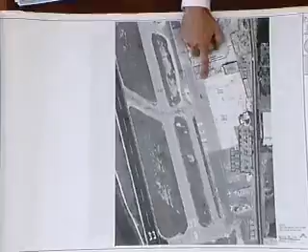Originally, the T hangars were going to be built here, and after the Planning Commission came out and looked at it, they agreed it would probably be better if we relocated them to this spot.

And these are views from across the street where the hangars will be located.

Instead, that's the view over here, from if you were standing near the sewer treatment plant, looking out to the west.

Across the street. Do you have any photos taken a little bit farther away looking at this? This is the farthest we could actually get, like up and down the street looking at it. This is taken from the sewer plant, which is across the street.

Do you have anything from farther away looking at it from the north looking south, or the south looking north? I have some. Might help, unless nobody else thinks it's necessary.

This is one looking from the new terminal down to, I believe, the FBO there, and the current location of the Atlantic's T hangars. This is inside the security fence at Atlantic's parking lot. That photograph is taken from right about here, looking that way, where hangar number 3 is.

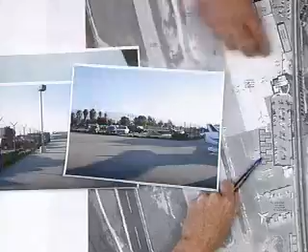This one is also inside the tarmac, looking towards the parking lot, at the corner of their security fence. So it was right about where those planes are. That's this corner, shot in that direction.

This one, a little further out, about here, still looking to the east along that fence. This one, right along the fence, looking from approximately the corner where the fence takes a 90-degree turn, looking this direction.

Looking back at the hangars, some of these are redundant, just a little bit better. Those are all from being on the airport, like if you're in an airplane or one of Rogers' machines. Yeah, these two were taken from across the street; those were all outside.

Did you make any changes to the design? We should probably look at that again because we have some new board members that haven't seen this project at all. Yeah, we did.

The request was made that they wanted a different design that's more traditional to the Santa Barbara Airport, so we popped the roof up, as I think one of you gentlemen suggested. We changed the style of it. We put skylights in there to liken it to the old hangar building that you view from the terminal.

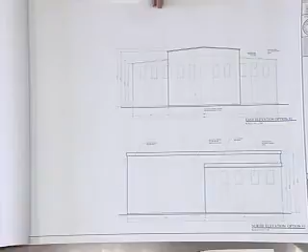Even though this faces the street, we put plexiglass skylights to be sure that rocks thrown from the street into an airplane would be less likely, to make it less of an attractive nuisance for kids to throw rocks through and cause damage to the interior or the airplanes inside.

We have more elevation views. All four views.

Do you have anything else you want to add to the presentation? We're just anxious to get it done.

Do we have any public comment for this item? Okay, question. Oh, I'm sorry, Madam Chair, could...

In November, the Planning Commission reviewed this item in concept and had some comments in their minutes that were addressed toward ABR, so if I could go over those.

Please. The Planning Commission expressed appreciation for the applicant's flexibility with changing the site and agreed that the original proposal was not supportable.

Commissioners Jacobs and Jordan asked that ABR spend time to create architectural variety that breaks up the design, includes landscaping, and consider facades.

Many commissioners agreed that preserving the view of the aircraft from the terminal is important and preferred this option to the original proposal.

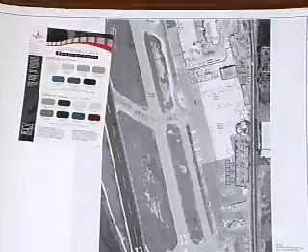So those windows are opaque. They're not—yeah, they're opaque.

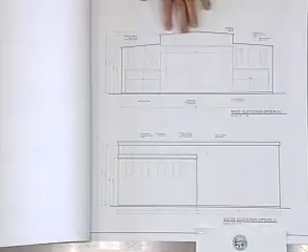And they're all staged by Atlantic Aviation. In other words, his personnel opens the hangar up, pulls the airplane out, and stages the airplane for departure. So the user of the hangar, for all practical purposes, is not in the hangar. Right. Okay.

One last question. Do you have any plans that show this building in relationship to any proposed landscaping as well as the existing landscaping that's next to the parking area? We haven't, in that the parking lot was already landscaped when we built the FBO 3 years ago.

Okay, and the problem is putting in the additional landscaping. We can certainly put shrubs or anything like that, but anything of any height—I think Andrew would be able to speak to it more clearly—is an FAA regulation where you can't have it that close.

There's already landscaping along this fence line, in the center here and on that side. So one of the questions I was wondering is what that separation is. Do you require like a 3-foot walkway so somebody can get behind here? I was kind of looking for a larger site plan to sort of see what was happening there.

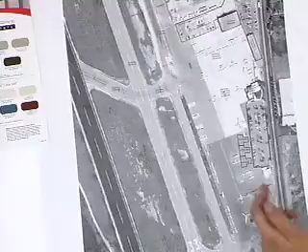The separation is really maintaining the AOA—you have to have 10 feet from the fence line, so that people couldn't climb over a tree to get onto the ramp. Okay, so it is 10 feet. So there's a 10-foot separation from the fence that's at the parking lot to the face of the building.

And that separation will be all asphalt? Yes, the way it's being proposed right now. And the landscaping happens to be on the parking lot side of the fence? Correct, and the asphalt's already there. Correct, and the airport won't allow us to put any landscaping on the inside of the AOA.

All right, thank you. Gary? I think all that, yes, that's all the questions, so that's good.

Kirk? Just to continue with Paul's question, because it does look like there is existing landscaping in this landscape strip adjacent to where your building goes, if I understand it. Yes, in the parking lot. In the parking lot, so, correct.

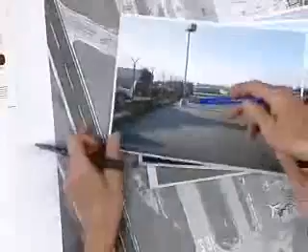But it's very low ground cover, basically. It looks like it's neglected. So is there an opportunity to plant in that space and augment that? No, the landscaping is maintained by Kitson. They actually do a very good job, but there isn't anywhere you could really put any landscaping there without being in violation of the Federal Aviation Regulations.

Well, for example, couldn't you plant a vine that would grow on that chain link fence? Would that be against the FAA regulation? No, it won't allow that either because you have to be able to see through the fence. Okay, it's a good idea.

There isn't any more empty areas of grass or anywhere where you'd be able to put in any more trees. Okay, all right, thanks.

All right, Chris? Just again to piggyback on that—in that existing planter, is there an actual height limit against that fence? Is there some sort of a code that we can point to that says no, you can't have this here? Yes. What is it? Andrew, do you know?

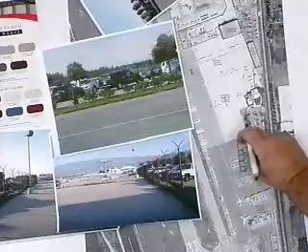I did have a question I wanted to ask. If there was a fence line here and here, same as this fence line, would that area still be part of the flight area? Could it be landscaped if this was not accessible from this area? And then could it be landscaped?

Are leases zoned as AOA and ramp? I don't know, I'd have to get with the airport directors and find out if they would allow that. Right now, it's considered ramp, and our lease doesn't allow us to put any vegetation on the ramp side of the property.

Chris, you want to start? Because a lot of the conversation is revolving around landscaping. Okay.

Well, from the way it sounds, we're not going to be able to get any additional landscaping to screen this thing, so I don't know what I could really add to that, other than we'd hope you would explore any avenue possible in terms of screening this from the street. Another thing I'm wondering is if it would be possible, as you had done in a previous submittal, to space those out a little bit more so it doesn't just look like one enormous building. If we put 10 feet in between each, then we get a little more light in between and break down the apparent overall mass of this. I know it'll stretch it out a bit, but I want to get the board's opinion on that as well, if that would be a helpful endeavor. But other than that, I don't know what we can do with landscaping, really, in this case.

I have two, can I comment? Really quick, yeah, because you could probably answer if they can be separated. Well, right now, that's why we elevated the buildings in the center, so that it would break it up. So right now there will be 3 different heights instead of the original plan, which is all one height. We can separate them if you would like additional differences there.

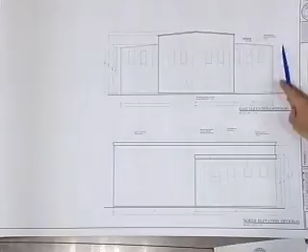So we need to see what that's going to look like altogether. So, for example, you've got these side wings, which are sloping in this direction. There's no gutter shown. And then you're going to have a building right adjacent to it, which is sloping in the same direction. So how are you going to handle the water that comes there? I'm raising questions here, just in general. Front to rear, they don't go from side to side.

But we don't have a roof plan that shows us how that's going to be handled, how the water's going to be handled, whether there's going to be gutters or not. There's a lot of missing information. Still a concept review, but they're really good points.

For me to be able to evaluate it architecturally, I need to see the facade as all three buildings proposed together, adjacent to one another.

Yes, that's it. Oh, there's one other thing: lighting. If there's any exterior lighting being proposed, we would need to see that in cut sheets as well. All right, thanks Kurt. Gary.

I appreciate the move towards moving the project over to this end as opposed to being in the view. And I do like the idea that you've got some fenestration on the street side, and I think these are all positive moves.

I do agree with Kurt that we have some projects we've approved in the past that replicate more of that military style. I mentioned this once before at a previous meeting, and I still would like to see it in that style, but I just want to voice my opinion on that.

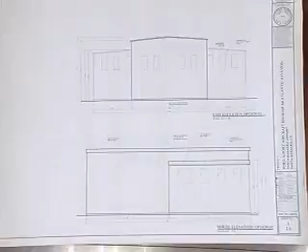So I can understand the logic of keeping it tight. One thing about the frames around the windows - this is what is perfect for a metal building, but like he made reference to the hangars off of Hollister, they're great-looking buildings with kind of a wooden Old West facade, and then there's a metal building behind it. If there was a way to put some framing material or sill to dress these up a little, maybe have half as many openings but spend more money on each opening to make it look more reasonable, instead of just simply inserting a translucent panel versus an opaque panel. That'd be one way of dressing up the building, making it more pleasing to the eye, because it will be seen from the public.

That's my biggest complaint or concern, and I think it's a fixable thing. You don't need to have this window tight in the corner, and you can rearrange these pieces. So it's a great project. We found a solution, we found a location. Now we're just doing a little bit of the eye wash stuff.

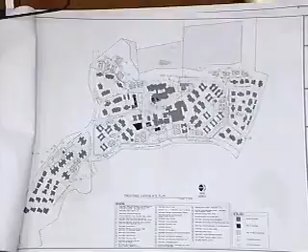What we're focusing on today is the areas in green. So we have the gazebos, which is basically like a neighborhood clubhouse, with laundry, a sink, and a little covered area, and that happens in 3 different locations on campus. Right in this location, we're tearing down an existing laundry and replacing it with a very small utilitarian building. The existing maintenance building is right in this area.

We are tearing that down so we can put in a parking lot for staff. We also have the new maintenance building, which is 1 story from the parking lot side and 2 story from this side over here. In front of that is a 1-story building, which is our new laundry. And over here is the existing pool and the pool building.

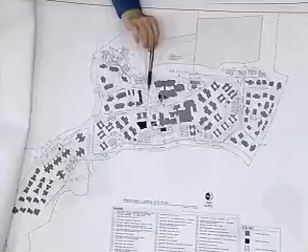One of the new things is we're looking at putting in a cafe in this area. One of the requests as we've gone through this project is an additional option for eating, and we had it in this area over here, but it's going to work out better closer by the pool, so I'd like to show you that probably last. Moving forward, so here's our maintenance building and the laundry.

One of the things that's changed is we had to work out an accessible path of travel, so we've moved our parking over a little bit. What's not shown here is some of the planter pockets along here that are in the landscape plan that has already been approved, but we still have the planters. Our accessible parking spaces moved over so we can get a path of travel that comes all the way down and across. This is something we've been working out with pre-case with the building department.

The basic changes are we took a notch out right in this location of this building, which you can see better in this location. Basically we just moved this back—it was flush, and we moved it back so we could create a place for a truck to back up and not be in the lane of travel. That way they could back up, and a lot of times we'll be receiving items for a remodel of one of the 200-plus units on campus—toilets, lighting, sinks—and we can back it right up and put it into a storage container quickly. We just didn't have the room as we started to study things, so that's a change.

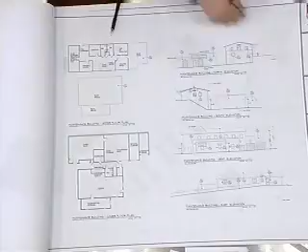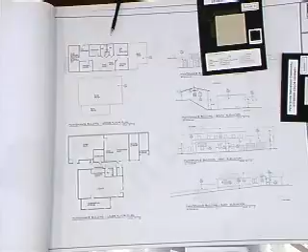Another change is we've added awnings. We wanted a little bit more interest in the building. The colors we've looked at—this is a color that we had, 7 different colors approved as part of the residential portion of the project, and this is one of those colors. Basically the maintenance building would be this green. It's up against a hillside, backing up on a nice gradual hill in oak woodland, so we're proposing the green color, and the awnings would be this black.

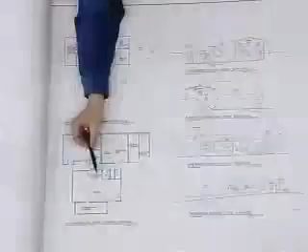I think those are the major changes that have happened on the building since you've last seen it. That, and we lost a bathroom in this location so we could put in the large electrical panel that we found out was going to be required because this commercial laundry took so much power. We were able to work that out with the building department and use the space of the restroom to create an enclosed mechanical room.

This is an enlarged site plan showing one of the gazebos and then the only laundry building.

Now, more on the south side is the other gazebo, and since you've last seen this, we restudied it. For some reason, the covered area was on the north side. That didn't make sense as we started to get into things, so we switched it to the south side and kind of redid the bocce ball court, bringing it a little closer. That's the major change there, so our accessible path of travel came around.

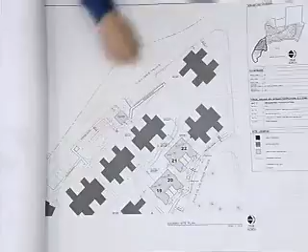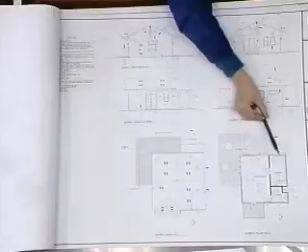Here is the gazebo building. So we have an entry element, and then we've got the covered patio. Here's our entrance, it's just a small activity room. We have a laundry and kind of an area where if you wanted to bring some food and lay it out, you could have a little gathering there with friends. And then a restroom. So it's a real simple building, and we try to keep it very similar to the detailing that is on the residential buildings currently.

So there's a lot of the similar detailing that you've already seen, same lighting, things like that. And the color for this building is this golden color. We've tested it on campus and got some good feedback from residents, so it's cheerful but not too bright a color.

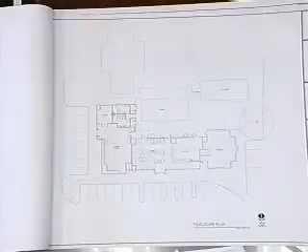Here is our cafe building. So here's the building. This is the existing library, it's right here, and we're not planning on touching that portion of the building.

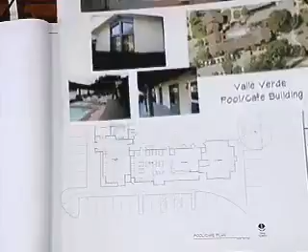There is an overhang that happens right here, you can see the overhang. So we're going to push the building out past that overhang, and then we're going to create a little entry element. The library pretty much stays as is. One of the other things is we're redoing the bathrooms so we can have changing rooms and bathrooms that meet our required number of restrooms. So that's a remodel in this area here.

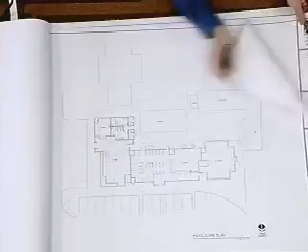So the building is also this yellow color, and the awning is this deep green, which will pick up some of the green that's in the proposed roof.

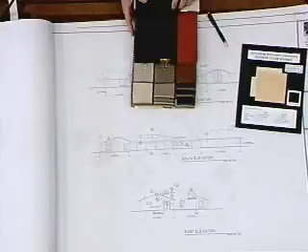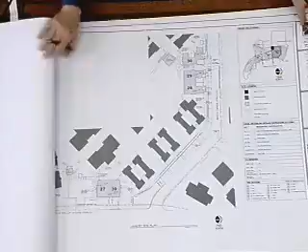This is showing the laundry building. So it's the only location right off of Calle de los Amigos, but kind of back behind a parking lot, and it's just a simple building. One of the things we had to study is how to make the building accessible, and so that's why there's a couple different doors, but that's what made the building as small as possible, being able to provide the accessibility more of it on the outside, less of it on the inside.

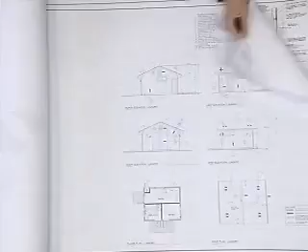Just kind of trying to keep within the residential character with a lot of the residential detailing and the same lighting as well. Most of these details you've already seen with the residential portion of the project. And we purposely tried to make the residential work with these buildings because they're similar in scale and size, so the detailing seemed to work well.

The newer details, like the scupper detail, that's for the maintenance building. And then the lighting, they're all the same lights as were approved with the residential. So, all right, that basically sums things up.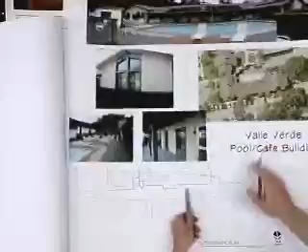Okay, and there's understory planting there as well? A hedge along here, yes. Are these planters or shrubs here, or are there actual additional planters along the front? There's no planters currently in this area - that's what we're seeing. So yeah, these are existing, and we're keeping all of these.

So it's on the back side, I think - isn't that on the back side? That's on the back side, and it's on the front side currently. Okay, so this is showing the front - oh okay, and this is the back right here.

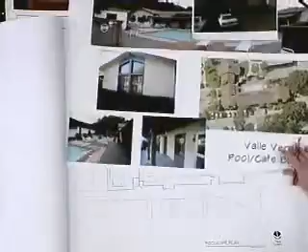The other question was about the pool, if there's any planting in that zone, or if that's as stark as it looks on the plan. There hasn't been a plan to have any planting in that area, but we just thought you should know. No, okay.

I guess this was a question for staff - the staircase along the south elevation of the maintenance building on the plan. Not the maintenance building. Let's go back a little bit. I was curious about this staircase here, if there needs to be a landing to break up that continuous flow of steps.

Thanks, Chris. More questions? Kirk. I'm sorry, I didn't catch the two color schemes - are they applying to different buildings? That's correct. The maintenance building, which is closer to that hillside, we made a darker color. And then the other buildings, which are the gazebos, laundry and pool, have this brighter yellow color - it's pretty bright for the existing campus, but we've tested it and feel like it can hold its own.

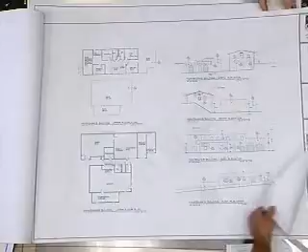I think, let's go one floor. I think that this elevation right here could use some something to it, because I think it's visible to the street, is that right? Is there a street and a sidewalk next to it? Well, it had 8 feet of electrical meters, but we removed those. It had 8 feet of electric meters?

We could probably find some type of fenestration that could fit in. Could we put some sort of detail on there, or fenestration, or something other than a drive-in movie theater screen? Yeah. That's my only comment. All right.

Kirk? Sure. I agree with the previous comments, and also I'm wondering on detail 55, the parapet detail, whether the metal cap, the flanges that go over the wood trim, could be reduced in height to a minimum, say like 1 inch. The way it's drawn, it looks like it's 2.5 inches. Other than that, I think it's a nice proposal, in keeping with the existing.

Chris? I agree with the previous comments, and the only thing I'll add is that I would encourage the applicant to increase the planting in the pool area wherever possible, whether it be new planters, potted plants, or possibly vines on the columns of the arcade there. That area seems quite stark, and it seems like a good opportunity to upgrade the area with all that's going on elsewhere.

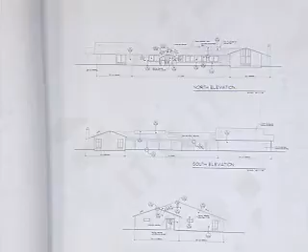Instead of just, you're going to have two pieces of equipment separated by 15 feet, so he's creating a really big wall that looks like a screen rather than looking like a chimney or something. That's my opinion, it may not be anybody else's. It just looks like an awfully big appendage to the roof that doesn't need to be there. So my opinion would be to screen them, but separately. And did you describe the trash enclosures that are part of the application?

The trash enclosures are just wood, that's what's currently on campus. How many of them are there and where are they? You didn't talk about them at all. I can come back with those when I come back with the maintenance building. But it's just wood, we're still working out the accessibility and which ones are required. So you're not going to include that - whatever you get today, you're going to come back with it.

I agree that there needs to be trim added to those buildings. Even though we have a storage building that's a 2-story building, I think it should be detailed the same as all the other buildings. I think that's the consensus of the board. So even the maintenance building gets the trim around the windows? Yeah.

That's all I have. So Justin's asking for final approval of everything but the trash enclosure that he hasn't gone over yet. I don't know how the board feels about that, but does anybody want to take a stab at a motion?

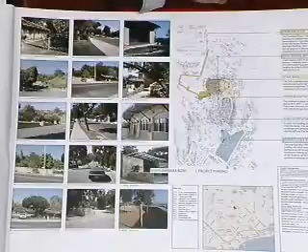So we are located on Milpas, right where it turns into Anapamu. This is our last project in a 20-year master plan with the Bowl.

Just looking at this briefly, we have the Overlook project. We've done Phase 1, Phase 2 is under construction now. We've completed the stage and basement and the pavilion in the main part of the theater. We've done a gate structure, Glen renovations, and the Wendy McCaw Terrace.

So you can see from these photos, this is the pavilion, Wendy McCaw Terrace. This is the gate structure down at the start of the Glen, and this is the first phase of the Overlook up here.

As far as this particular project, we're looking at 1130 Milpas, which is this parcel next to the county property, and this gets clearer as we flip through a bit more. This is the existing Dryer building, which is their box office, and there's an existing stone wall that runs between this property and the next property over, shown here.

It's mostly residential down in this part of the project, as you can see from some of these, and there's apartments back to the north of the project.

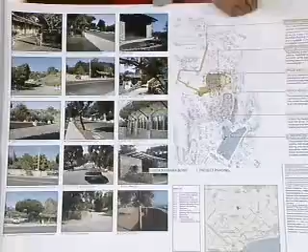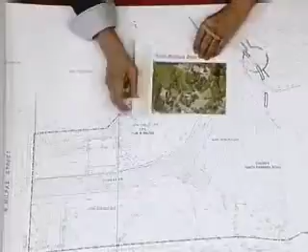Let me flip through these real quick. This is a topo map—I'll show you a site photo real quick. We're in the process with the City Council and Public Works to abandon Lowena Drive, which goes through their parking lot. Lowena starts from Anapamu, loops around, and then goes through the parking lot back to Milpas. It serves a few residences on Lowena Drive.

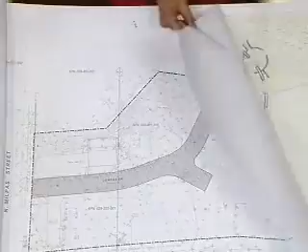So to flip through real quick, this is Luena Drive—we're in the process of getting, Santa Barbara City has a maintenance easement over county property, so it's county property as the underlying land owner. We end up with an R3E1 split designation on the 1130 site. These are the setbacks, double setbacks because we're in a commercial and residential zone, that's counted as front yard and front yard.

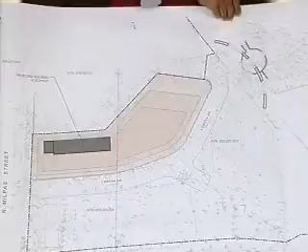This is all the county property coming up through here. Once that road gets abandoned, it changes. We have front yard setback, side yard setback, front yard setback, so this is our building envelope, and this is the proposed building within the setbacks, outside of the setbacks.

So the goal of the project right now—this is the county property over here. Currently we have pedestrians and automobiles sharing this driveway. In 2005, the Bowl had the opportunity to purchase this property, which they did. This will give us the ability to design a plaza area where we can separate pedestrians coming in here from automobile traffic coming on this side.

We have taken the functions out of the existing Dryer building—administrative functions are here, ticket sales are here, we've designed a small restroom here. There's a floor plan I'll show you when we get to that. The Dryer building will remain in its existing condition. There's a conference room in there that'll continue to be used, and security uses that during the shows.

We're keeping the existing oaks through this area. We've done planting along the edges. This plaza area is basically a 2% slope, so it's all handicap accessible—handicap parking places, shuttle bus pickup, which loops around and takes people up to the bowl.

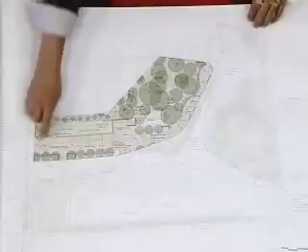This is the city parcel. Everything else has been shaded out so you can see what you're looking at for the city portion of the review.

Floor plan again: administrative area, ticket sales, public restrooms here. We've done sections, you can see the existing grade. This one's taken up here at the restrooms, so we're getting rid of that amount of grade. It's a concrete building with a green roof, buried into the hillside and holding the hillside up where we cut into it.

Section C is here, and then as we work our way to the back, section B, and then section A, it gets pretty close to grade back in here. There's not much excavation by the time you get back to this part of the site.

So basically it's shaving this part of the site to match the roadway that comes in on the county side. Except this is the line of the existing grade here, so there's quite a bit of excavation, even at the building on the back.

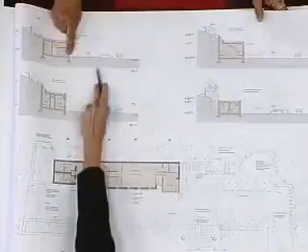There's an old greenhouse here, greenhouse footings, and that's why it's shown like that versus the natural slope that comes down.

You guys have a big apartment project on top of the hill over here that's been previously approved but not built yet. Right now there's just a single-family residence there.

As far as elevations go, we're looking at an integral colored plaster over concrete structural walls. We don't need to get into colors now, but this will tend to match what we put on the pavilion.

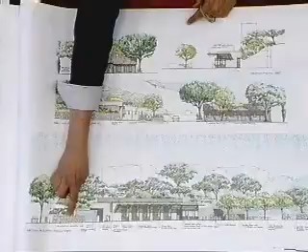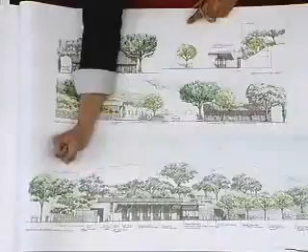This is the stone wall that we're taking out and wrapping back into the project site. We have tube steel trellis elements for shade structure, growing vines up the walls and out onto that shade structure to give shading to the building. There's a green roof on top, and a skylight at the back of the building, which picks up some retaining also. The grade at the very highest point comes up this high in the back where the building's pushed back into the hillside.

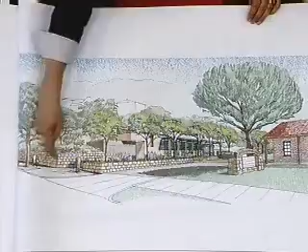You can tend to see it in elevation. From your street view, you'll basically be seeing this elevation, the corner of the restroom, and then a face of the building. So it steps back from the street.

We're trying to keep it a nondescript background building so it's not competing with the existing dryer building, really emphasizing the landscape, which is a major feature of the bowl as we walk up the Glen. That Glen landscaping is supposed to come all the way down to Milpas, trying to give a real nice pedestrian feel to it. That's what our goal is.

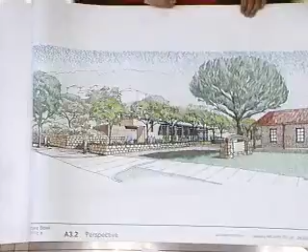Susan, do you want to talk about it?

I was given a good lead-in, in that the landscape is very important here. For a long time this area has been a lot of asphalt, and now we'll have a very warm, welcoming experience for people coming to the bowl that starts down at the street instead of waiting until you get up to the new gateway in this area. We're bringing the same feeling in the landscape that exists in the Glen down into the backdrop.

These are existing oak trees shown with the open circles, and we're planning on using the same woodland understory kinds of plantings that we've used up in the Glen, and they're all native.

It was necessary to bring people along the edge of the road and not be part of the road that takes the utilitarian traffic of setting up for the shows and the big trucks, and separate that traffic. Those several oak trees and a palm—really two oak trees and a palm—are offset by other oak tree plantings within this area, and this whole hillside, which is currently not landscaped, would now become an oak woodland of a drier sort.

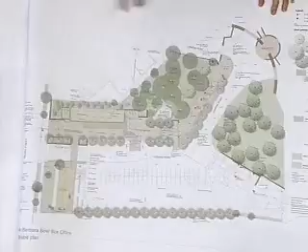We're using native plantings throughout the site, and as we get closer to the street and along the edges, we start to emphasize the ornamental character of the drought-tolerant native landscape. So we have these beautiful flowering trees right along the edge.

As Steve pointed out, we've got screening along this edge. The reason we can't have the usual planters in the middle is that this also doubles as a staging area for the trucks. To get an idea of the size of those trucks that need to maneuver through this space—which is a very practical consideration, obviously, for the county bowl—the trucks need to be able to get in there.

Here's a typical shot of truck traffic. We have touring buses and trucks. Before the show, they stage in that area, and you can get an idea of the scale and the maneuvering room they need.

So really, it's a dual-purpose space—a maneuvering space and parking for those large trucks. Then during the show itself, after everything's set up, there's plenty of parking, as much as is possible to bring into this space. But we did look at providing as much landscaping as we could in that area and have it still function for both of those purposes.

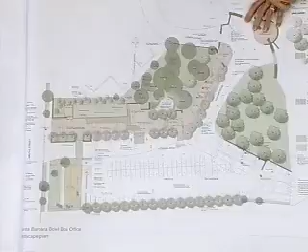Then, in addition to this nice pedestrian plaza, we have a little seating area where people can wait for each other or for pickup and drop off. We've surrounded it with a bit of a rock garden, which we'll be bringing up a lot of Santa Barbara sandstone for as part of the project, creating a rock garden with native succulents, Dudleya, and others as a backdrop.

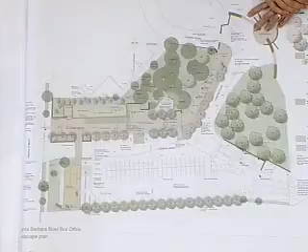And in order to celebrate the begonia nursery that used to be next door, we have, in the shade and tucked in next to the seating area, an area for some of the specialty begonias that were grown for many years next door. We've got native planting again surrounding the building, and the building itself will feel more like a landscape element than a building, because it's composed basically of plants and sandstone.

So I'm here for any questions. Anything, Trish?

You've gone over everything in the area that's not under our purview—everything that is just this area mainly. Yeah, it's all this area, it's the county's property mainly. We'll be running this through BAR concurrently.

We also took into account watershed management concerns. So not only does this serve as a giant bioswale, but we also have bioswales in the planting. Along the front of the building and on the other side of the parking lot, those will be designed to accommodate storm water runoff. This is permeable paving in this area, and with our green roof, that'll also help manage the storm water and make the situation a lot better than it is now.

Okay, thanks. Do we have any public comment for this item?

It's not part of this project. That's correct. The only thing to point out, it probably shows better on your landscape plan, but we are pulling out a small tree right here that gets removed, and then it gets replaced down in that area. We're doing a new parkway in front of the dryer building there. But so the plan is to leave the lawn in the current condition that it's in? Okay.

This might be easier if I show you up here, but the barrier between the new parking and the entry plaza, right here, is there any sort of barrier? There's a curb with a planter behind it to pick up the tree row we have there. Okay, and then the plaza will come up to that area.

Right. And then you had mentioned that you're not able to put any additional trees in the parking lot. If we exhausted all possibilities there, you need obviously lots of space back in here. Is there any opportunity to get some trees in there? We're not really reducing the asphalt a whole lot here, so the bowl uses that entire area for truck circulation. We did take a very careful look at that and tried various solutions to get the trees out of the way, but whatever you do, a truck will probably bump into it, which is not that good for the tree.

And then the final question is, obviously this is still fairly preliminary, I guess, but you've labeled permeable pavers. Have you chosen one yet, or are you still looking at all that? No, still looking at that. And details within the paving and all that would be addressed later. Yes, correct. Thank you. Thanks, Chris.

Right. We're just going to have a lot of people. We're giving more width, so it may not be quite as tightly packed as what you've seen in the past.

The other question I had was regarding the public comment, was there consideration given for the residents being able to turn around prior to the gate? We're looking with planning on that, just to let you know, if we put in a turnaround at this area, which we can consider doing.

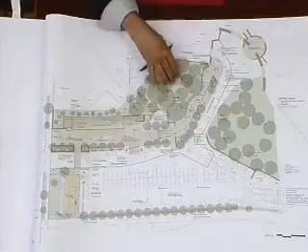The implement, right now we have a 4.5-foot wall here. The grade falls the further we get out here. And so in doing that, we will have to create a bigger, taller wall along this area, and potentially take out some trees. Another oak tree. Okay, yeah, so that's the implication of what will happen. But we're working with planning to determine if they want anything at all, if they want it, what diameter radius they want.

Okay, and then we'll bring that back to you.

And then regarding the building itself, the painted metal looks like flashing and louvers that occur on the roof and also on various parts of the elevation. Did you have an idea of what that would be?

The only thing you'll really see is we have tube steel trellis members here, and we'll match what we've done on this gate structure, and we've done it on all the other projects.

No, I was referring to the metal louvers on the roof. Over the skylight? Yes. Oh, we haven't gotten into that detail.

Okay, but it looked like there was also other areas of painted metal on the elevation, like below the windows and so on. Is that to match the trellis? I don't know if there's any metal down low on the building.

We haven't determined that material yet. It'll be recessed back in. We'll end up with 8-inch concrete structural walls, then we'll fur off plaster, so we'll probably have close to a foot of depth. In fact, when you put insulation on the inside, we'll be over a foot of depth at the windows. So that'll be a recessed panel down low.

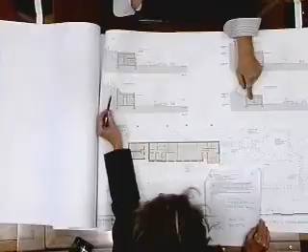Do you have any more questions, Stephanie? I had one question - I'm trying to understand the height of the building. I've got 10 plus 2 to the top of the parapet here, 13 this floor plus steps, 2, by the way. So this one steps down a couple feet, that's 10 feet, then this is 13-foot plate height, it's about 15 feet to answer your question - 15 feet to the top of the parapet.

Because then if I look at the elevation drawing - it gets deceptive there because this floor is lower, it's 2 feet lower than back here. But looking at the back of the building, I get 15 feet - so here I'm at 15, right about here, according to yours.

Okay, those look like really small people. Yeah, that could be too, you know what I mean? It's 15, yes, 15. It just looks like a 15-foot two-story full building - how big do the people scale? They're 5 feet - oh sorry, all those. It's the children, they're children, in suits. Okay, I just wanted to resolve that because the elevation makes the people look massive here.

I think there's a slight slope usually going down - architects go the other way. Yeah, I know, we blew it. It's probably 15 feet back here, and then as it comes over here it's dropped 2 feet taller, so it's probably 17 feet, something like that there. It is 17.

I didn't have any more questions. Comments? Who's ready to make comments? Dive in, Keith, go ahead. First of all, the modifications are really technical in nature and don't have any aesthetic impacts - I don't think we should have any issues with that. Like Kirk said, I think it's going to be a great project. I really like the integration of the architecture and the landscape.

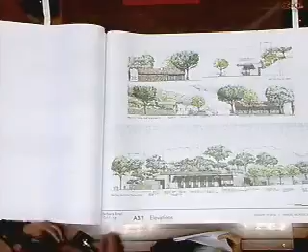I think the only other comments would be I'd encourage adding as much bike parking on the county portion as you can. And I don't know, given the truck traffic, what you eventually might be able to do there paving-wise, just to maybe ditch the asphalt and get more permeable materials through there.

Yeah, I think it's a really, really good project. Also be interested to see the development of the lighting plan as you work through the process with all the pedestrians coming through there. We have lighting shown on here, but we can talk about that more next time. So yeah, I think it's really supportable, and look forward to moving forward.

I'm going to lean towards where Kirk was going, and it being a little too contemporary in its design. Where I'm looking at it is if you had slumpstone in that one building, you can bring some historical massing of the slumpstone to some of the other buildings to sort of tie the two together, or at least age it. It's great that you're doing a subterranean building.

It reminds me of, I think it's Las Positas Park, it's got all those restroom buildings built into the wall, gray concrete. But here you've got a choice where, building material-wise, he was always using the word integrating the historical aspects to it. So I don't think the floor plan has to change or the whole concept, but it's a little bit on the stark side and a little too modern or contemporary.

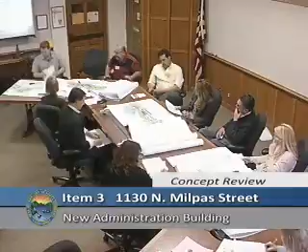I think it's a really nice looking project as well, and I think the materiality for that entry would help quite a bit. I'm not too bothered by the style, because I think it's happening up where the new stage is and the other accessory buildings near the top, so it actually is starting to provide some continuity throughout the site.

One of the issues I was having is where the new plaza comes in off the street, and there's new parking, maybe 30 feet that starts in. I'm a little worried safety-wise about having that parking with no barrier between it and the plaza. If somebody gets in their car with a big crowd of people and accidentally puts it in drive instead of reverse, you could have some problems.

So more than a curb? More than a curb, I would say. There's been a lot of instances - there's a planter in there. I think a more substantial physical barrier, as well as a visual barrier, would help, because people walking through the plaza just looking at cars isn't the best visual impact you're going for upon entry to the bowl.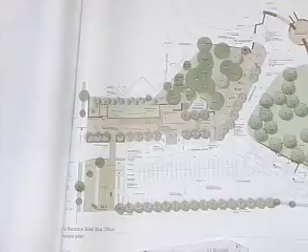At the very front of the site, where that existing wall is, I'd actually like to see that come down. You mentioned wanting to keep it high, but even if you stepped it back a couple feet, there's going to be a lot of people along Milpas and coming in - it happens now - walking around that corner and bumping into each other. If they had a little more of a heads up, seeing people come from different areas, that would help. A little step down, and the pavers, I think, is a good call. I'd just steer you away from - and I'm sure you'll choose the right paver - just avoiding the Disneyland look. I think a tumbled paver might be a nice option for the plaza.

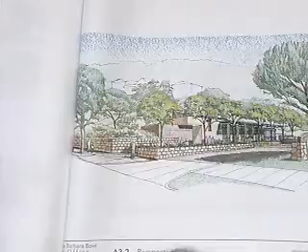I'm fine with the green roof. I think, especially for that new development just above, for them to look down onto something other than a standard roof would be a good thing, even if it's not seen from anywhere on the Bowl property.

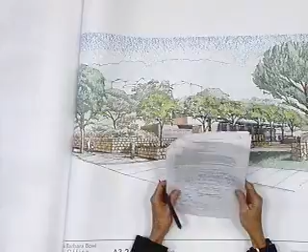The only other thing was where that Lowena gate is proposed on the south side, shown as a chain link fence on top of the existing wall. We'll do a wrought iron instead. And I think that was it - the only other thing was those planters at the front. Susan, I assume those trees would be centered? Yeah, that would probably be centered. I didn't know if there was an issue with the trucks coming out if you held it back. They should be fine. Okay, so that's all.

All right, Stephanie. I really like the project a lot, and I like the contemporary design.

I think it's okay. If we're going to go more traditional, go towards some of the buildings you've already done on the rest of the campus, the Wendy McCaw Terrace building, for detailing similar to that.

I really like the idea of the green roof, but if you can't see it, I would really like to see it from somewhere on the street. It could be pitched, or lower the parapet, some way to appreciate it from the ground or from the street. If not, then I would abandon it.

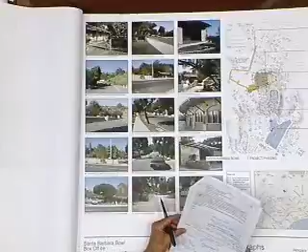The Wendy McCaw Terrace and some of the detailing in that building is very nice, and I think if you could pick up on some of that for this structure, I think it would be really nice. But I'm not of the school that this has to look like a traditional Spanish Mediterranean building. I don't really think I have anything else to add.

This is comments only. We've been asked to separate the comments from the County Bowl, the Santa Barbara Bowl County property, versus the city property. So whoever makes a motion should separate it into the 1130 North Milpas property and then the county property, 1122. Just keep that in mind when you make your motion.

And I'd like to move on to the next agenda item, so I would like to get a motion.

Okay, thanks Keith. This is indefinite continuance back to full board eventually with the following comments. First, comments regarding the county property: the board would like to see the chain link fence replaced with wrought iron to match the rest of the property. Some of the board members feel that a vehicular turnaround on Lowena is appropriate.

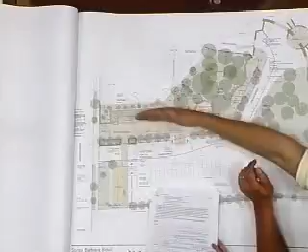If you had a 12-foot plate here, and then this was a red tile roof that went up, and you had a 3-in-12 roof pitch that matched this - we don't mind looking at a tile roof, but that brings down this front elevation to pedestrian scale, because you've got your 5.5-foot person here and a 17-foot high wall. We'll look at the height for the building. We also have this trellis which is down off the parapet, which will lower your height also. We don't really have time to get back into comments again, but I think the applicant understands the situation, and as the architects, they can come up with ways of studying the reduction in the plate, too.

More discussion items? No. All right, all those in favor of the motion say aye. Aye. Opposed? No oppositions? Yeah, I'm going to be opposed. Okay, one opposition. Abstentions? Okay, motion carries. Thank you. Thanks, guys.

Okay, moving forward to our last item on the agenda is 301 South Hope. Thank you.

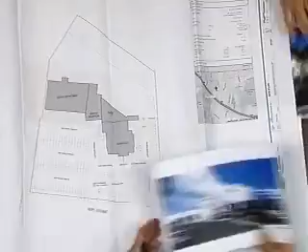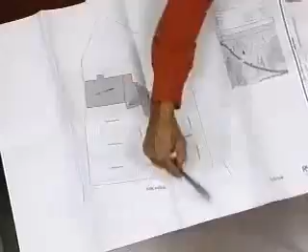What's going on around the site? Well, this is a vacant lot right here, actually owned by Hughes, and across the street there's a housing project, Don Sharp office buildings across Hope. The other dealership, the Smart Car dealership, is over here, and then this is San Antonio Creek, and La Cumbre Plaza back here.

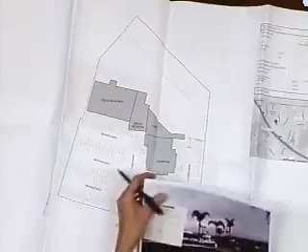I guess I was having a problem because all I saw was the site and nothing around it, all the photos are just the site with nothing around it, so I was looking for a context photo. Sorry, that's my fault. Maybe there's some in here. I don't think so, I think we just have the shots of the dealership building.

Yeah, I get it now. Okay, I'm here. Madam Chair, staff will have some comments on it before you make comments. There is this, Don, which kind of helps if you want to orient it - it's the second property on Hope, right? Yeah, it's the second one in.

So the way we're looking at this, here is Dick's dealership, this is the one nearest the freeway. This is that vacant lot, the creek that runs through. Got it, perfect, perfect, thank you.

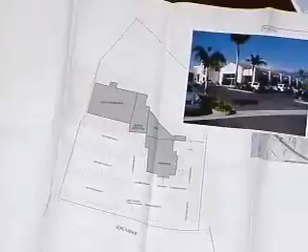Okay, what are you doing, what are they doing, what do they want it to do? Cladding in metal. So it's really, I think, the best thing - two photos would be, well the little rendering actually would be the best thing to see based on these photos, that's just changing this look to that look, that's what they want to do.

Big blue bar in the front, aluminum panels, and of course the signage is not subject to your review at this point, but that's what their proposal is. Here, this one right here.

And then you have elevations, I presume? Yes, there are elevations in here. So that's the front that faces Hope. You can see what's being proposed in terms of the metal.

That wraps around the side. The rest of this would just be painted; they'll leave it stucco or plaster. So they bring that metal back around past the service bay.

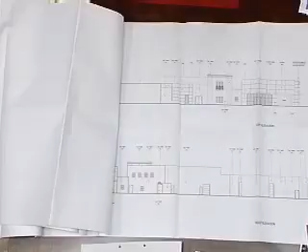Is that what I'm looking at? Yes, that shows on the front elevation. So you're looking at the service bays. This plane is set back, this plane is there, and this plane is up forward. But this is also metal.

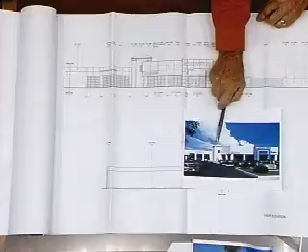What do they call it? This is aluminum and stucco panels — the aluminum is new, the stucco is to remain. I'm not sure what they're proposing for the roof, if they want me to take the tile off. That's a red clay tile roof right now, and that would presumably go to a metal roof. Is that your full presentation?

Yep. All right, do we have any public comment? None. Questions from the board? No questions. Okay, comments.

Stephanie? I'm opposed to this project. How do you really feel about it?

I really like the detailing and the historical character that Brian tried to create in his 1990s version of the property. It's in keeping with Santa Barbara style, and we worked really hard to achieve that, and I think it did so more successfully than any other dealership out there.

Thank you. All right, Keith? Thank you. I would agree with Stephanie. I don't think it's supportable. Given the context, across from the other auto dealership that's in a Spanish Revival style — if this were up Hitchcock, where there are other more contemporary dealerships, it might be a plausible direction. But in this location it's incompatible with the context.

Thanks, Keith. Paul? All right, is that it? Gary? Yes. Chris? Same. Okay, I don't have anything further to add. So I agree, I don't think it's appropriate.